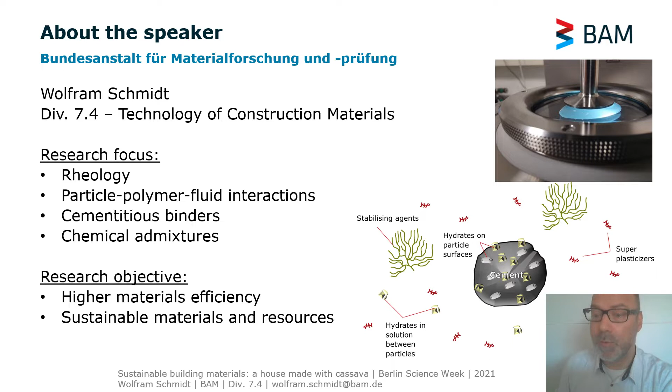Since rheology is in the center of my research, I'm also the secretary of the German Rheological Society, but at the same time I'm always trying to convert this research into more societal relevant aspects. Therefore, I'm also an officer in the Bureau and the Development Advisory Committee of RILEM.

RILEM is an international network of experts and laboratories in materials. And here I'm also the convener for Sub-Saharan Africa.

Together with RILEM, I've been heavily involved in the development of the global consensus on sustainability in the built environment, which can really become a game changer because all the relevant associations dealing with pre-normative developments and research, who have a big impact in the world, are involved. They take over the responsibility, but also the initiative to change something in the future.

This sustainability research has also been a companion to me over the course of the last 12 years, when I started to collaborate with researchers from all over the African continent in laboratory collaboration, but also educational activities and a lot of research activities.

Within this framework, in the year 2018, together with my colleague Dr. Kolawole Olonade from Obafemi Awolowo University, we were awarded the German African Innovation Incentive Award by Federal Minister Anja Karliczek. But this is not the only part of the research.

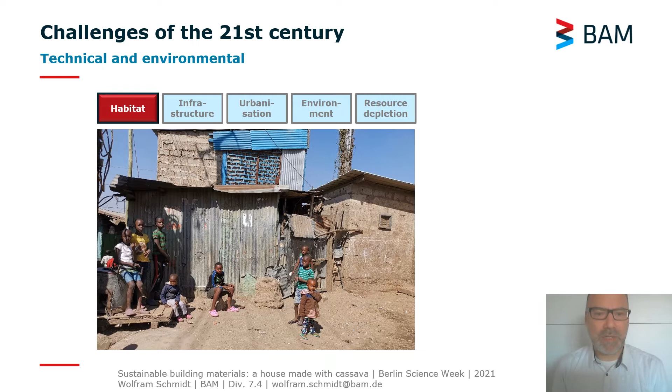Now, without further ado, I would like to come to the challenges of the 21st century, to the core of that talk, where we can see that at least from a technical and from an environmental point of view, these are the most challenging ones: habitat, infrastructure, urbanization, environment, and resource depletion. And if we take a closer look at these five challenges, we see that concrete plays a major role in creating these challenges.

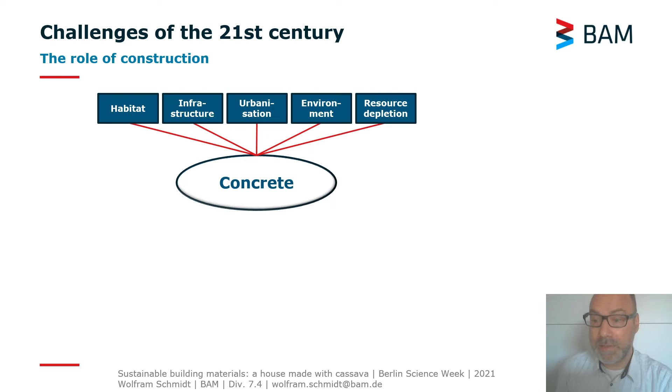Because concrete is nearly half of everything that human beings produce. After water, it is the second most consumed good on Earth. Concrete is everywhere. And we know that the entire built environment contributes to about 40% of the total global carbon emissions, the construction industry for more than 10%, and cement production alone for about 5 to 8%.

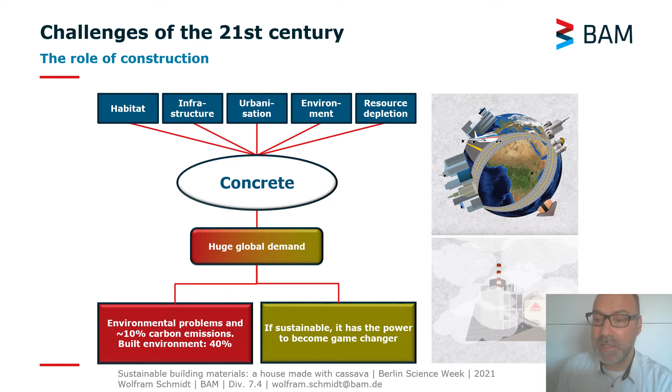So these are dramatic numbers where you could really get desperate. But on the other side, you can also see that if there is such a huge global demand and this material is required also in the future, if we change something in a material which is required all over the world, we also have the power to change something, because that is a huge leverage to really have an impact.

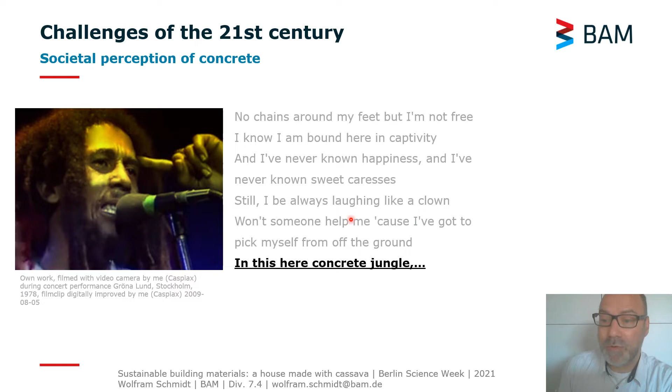But the problem is, concrete has a very, very negative perception in our society. Bob Marley already sung about the concrete jungle, where he sang, 'No chains around my feet, but I'm not free. I know I'm bound here in captivity in this concrete jungle.' So it really doesn't have a very good reputation.

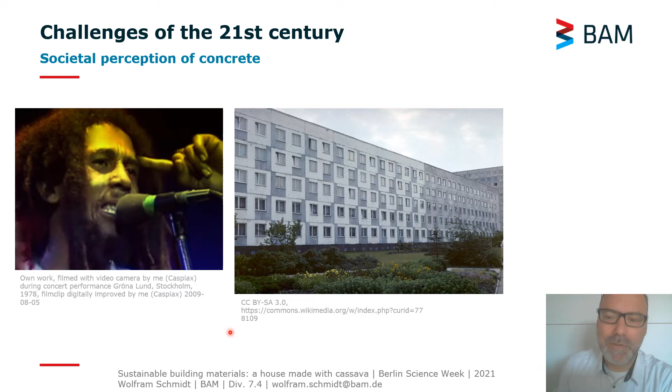And indeed, if we take a look at certain structures and certain quarters in our cities, we see this really resembles a concrete jungle. But is it really the fault of the material, or is it the fault of the architect? Because there is also wonderful architecture which has been implemented particularly by the strength of the material which is called concrete.

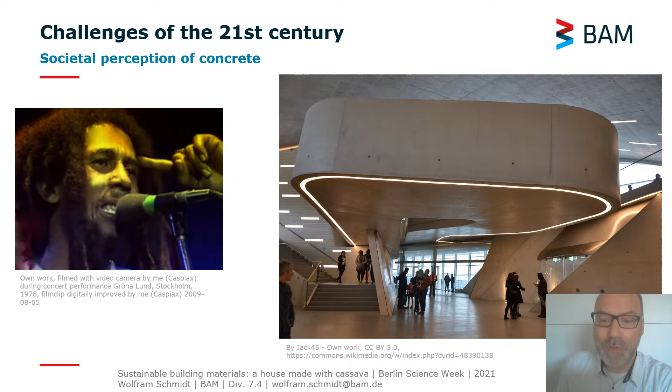Therefore, we always have to take a look at those materials that can really be used for our urban structures, those mass materials, which all have their pros and cons: earth materials, timber, steel, concrete. So we have to ask ourselves, why do we have to use concrete at all?

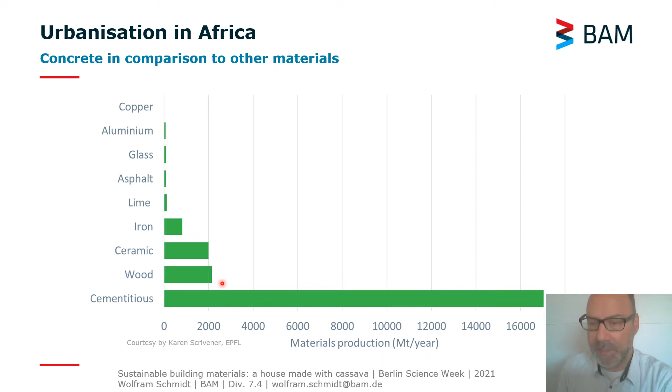And the simple answer is that cementitious materials are the only materials that can really meet the demand. Here in this figure, you can see the production of cementitious materials all over the world in comparison to other construction materials, and you can see that it's just an order of magnitude higher than everything else. And the production certainly also represents the demand on Earth.

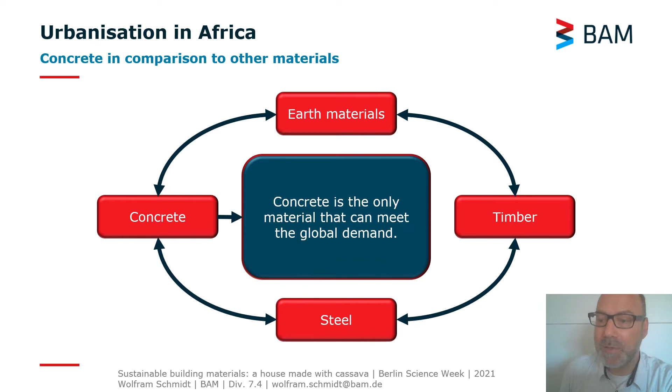And that means concrete is really the only material that we have on our Earth to meet the demand of the growing population to live in urban environments. It also means it's the material that will continue to build our cities.

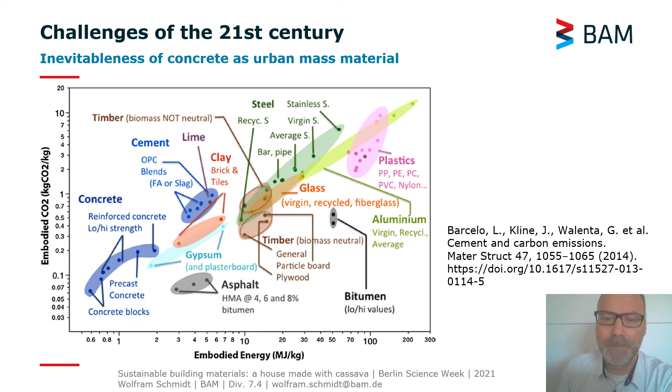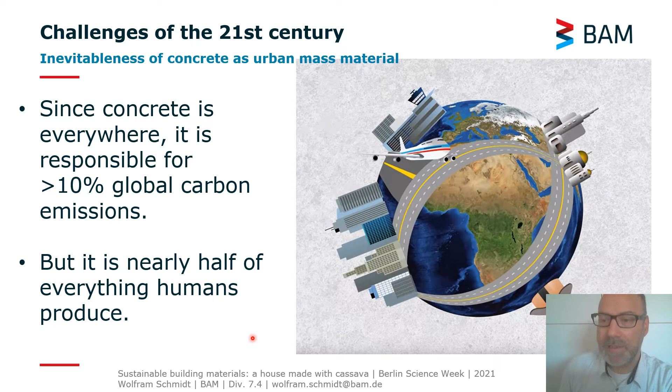We also have to see that, yes, it's true, concrete is responsible for about 10% of global carbon emissions, cement alone for about 8%, but we also have to see that concrete is nearly half of everything that human beings produce. In this light, these 10% are not the worst.

Another aspect that makes concrete absolutely inevitable is that the chemistry, the elements that are used to produce concrete, are exactly those elements that make out 98% of the outer Earth's crust. That means the chemistry of our planet also determines which materials to use, and in this case that seems to be concrete. We just have to look at different sources to find these elements.

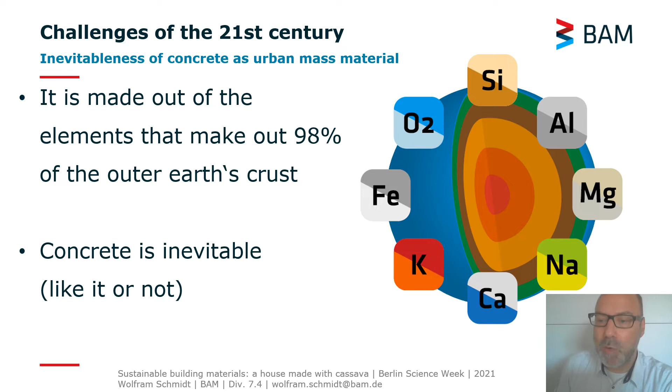So concrete is inevitable. Whether you love it or whether you hate it, it doesn't matter. There is no better alternative to concrete.

But the good news is there is a slightly better alternative, because we can make this concrete greener, more sustainable by using more sustainable cement types, by using better concrete types, and also by using less cement and concrete. Another aspect, which I'm not going to elaborate on today, is that we also have to develop structures that require less materials, or that use materials at their best performance ability.

So there is a special African challenge. I mentioned that already before a couple of times, and that is urbanization. We have to see that the urban population grows all over the world, or has been growing all over the world, and it seems the trend continues.

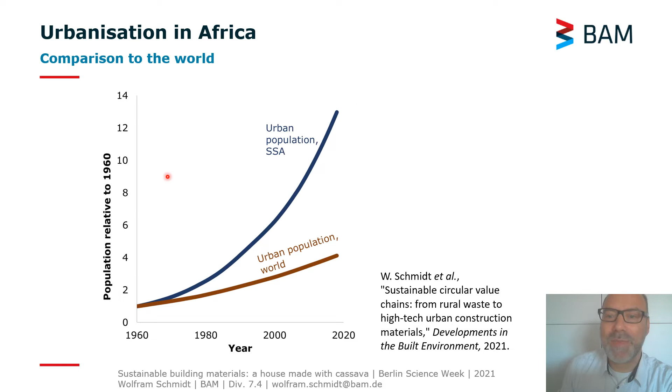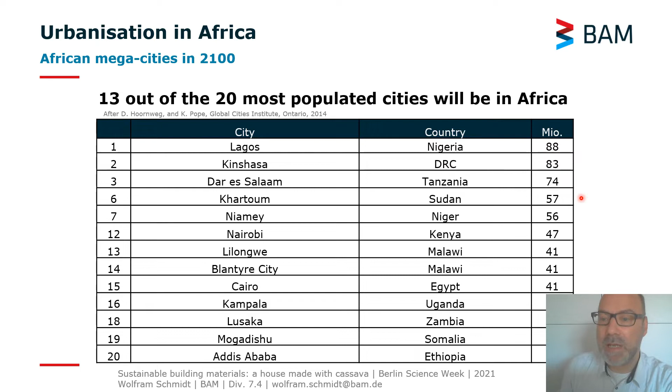But particularly in Africa, this growth has been dramatically higher. As a result, in the future we will have megacities in Africa which the world hasn't seen before. 13 out of the 20 most populated cities in the world in the year 2100 will be on the African continent. We will have cities like Lagos with 88 million inhabitants, Kinshasa 83 million inhabitants, Dar es Salaam 74 million inhabitants. These are challenges that are unprecedented.

And the good thing about it is that of those structures—these numbers are until the year 2050—of all those urban structures that will have been built until the year 2050, only 20% already exist today, which means we are going to build 80% of the urban structures in 2050 over the course of the next 30 years.

And 30 years, considering a construction process, is really not long. So we don't have time to spend on, okay, first we have to do this, and then this has to come, and then this has to come. If-then solutions are not an option; we have to act now, and we have to act all.

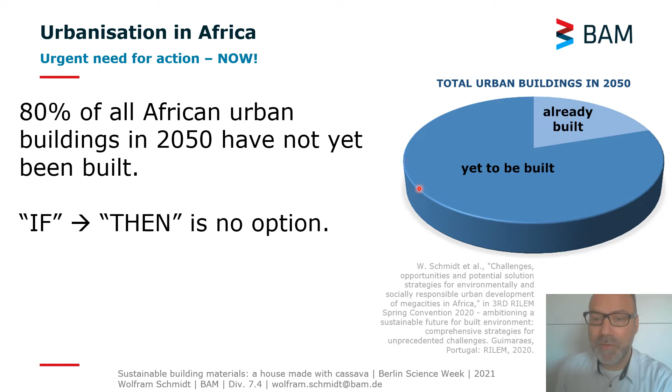That means we have to develop greener mass materials already now. Certainly there are technologies like carbon capture and storage that can contribute to a greener environment, but we cannot wait for that. We have to use the solutions that already exist today.

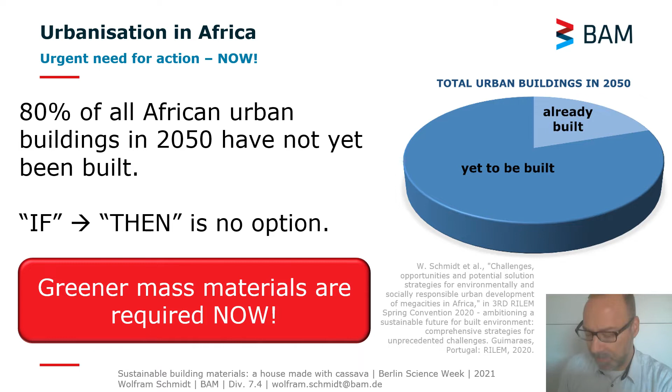And now let's talk about the innovation potentials in Africa. Therefore, maybe it is important to first see how concrete traditionally works.

We use cement, which finally, as a reaction with water, forms the cement paste, which is the binder for the sand and the aggregate, which are mixed with it.

Now, in order to make concrete greener, to reduce the carbon footprint, we have to minimize the amount of Portland cement clinker that we are using in our binder and replace it by so-called supplementary cementitious materials, which have a lower carbon footprint. In addition, the more water we add to concrete, the lower the strength and the worse the durability will be.

So we have to find ways to minimize the water content in concrete, and that requires chemical admixtures. Also, these chemical admixtures can contribute to compensate for some negative aspects, particularly with regard to workability of those supplementary cementitious materials.

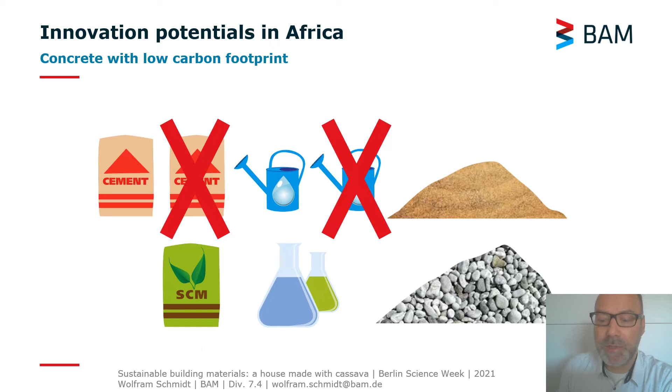So we have the supplementary cementitious materials as one part of the solution, and to understand how they work, it's necessary to understand that cement and water react, and immediately upon contact, all kinds of reactions take place at the same time.

And these reactions are very complex: new phases are formed and dissolved, adsorption takes place, crystallization processes, dissolution, precipitation, and so on. The type of reactions that take place, depending upon the chemistry of the cement, are very complex, and they can have all kinds of effects depending on the application as well.

But the most important phase is the reaction of the calcium silicate hydrate phases, because these calcium silicate hydrate phases provide strength to concrete. And pretty much linked to it, there is the formation of calcium hydroxide, which provides certain properties in concrete, but mainly does not contribute to the strength of concrete eventually.

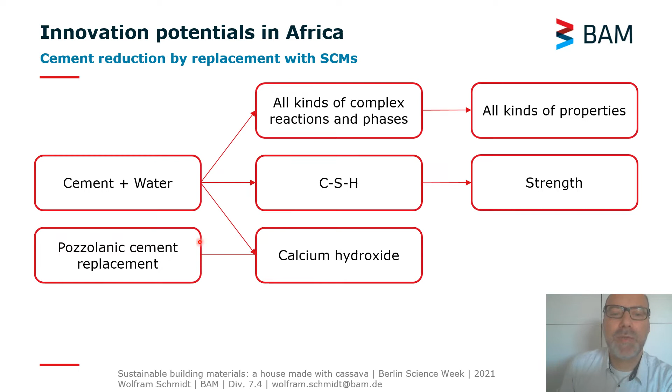And this is the point where the supplementary cementitious materials, particularly the pozzolanic materials, come into the game, because these pozzolanic materials react as a secondary reaction with the calcium hydroxide.

And this reaction forms supplementary calcium silicate hydrates, which give additional strength to concrete. And this additional strength potential can help us to reduce the overall cement, or the Portland cement clinker that we're using in our binder.

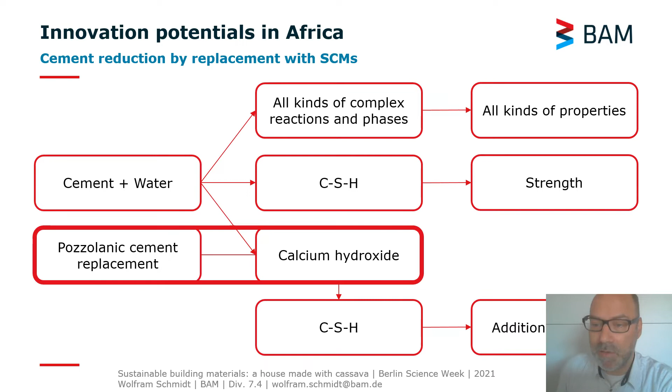Now the other part I was talking about is when we use chemical admixtures. In traditional concrete where no superplasticizer is used, cement and water are added for the reaction to form calcium silicate hydrates. But unfortunately, the water amount required for the reaction is too low to provide good workability of the concrete. So even though we could theoretically achieve high strength, when we cannot compact it, we cannot really use it. So we have to add excess water that provides workability, but this excess water, which does not react, evaporates and forms pores, and that reduces the strength of concrete.

Now, if we use superplasticizers, they adsorb on the surfaces of particles and increase workability without adding water, so we do not need excess water. With these superplasticizers, we can really increase the strength, and by increasing the strength, we can reduce the overall cement amount that would be required.

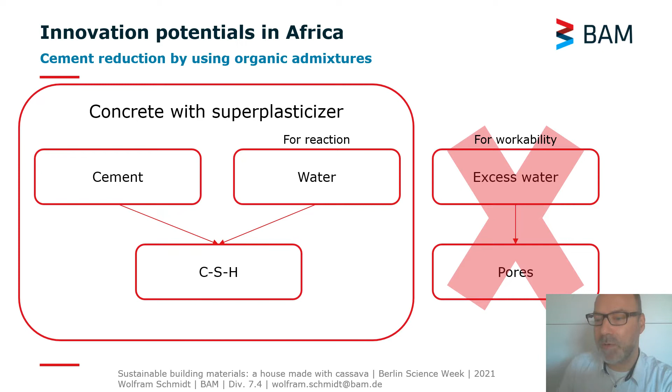So both strategies work in parallel. We've got these two strategies: we can save cement by reducing the clinker content, but in order to make the entire concrete greener, we have to find novel replacement materials like calcined clays, for example, or what I'm going to present about, waste materials.

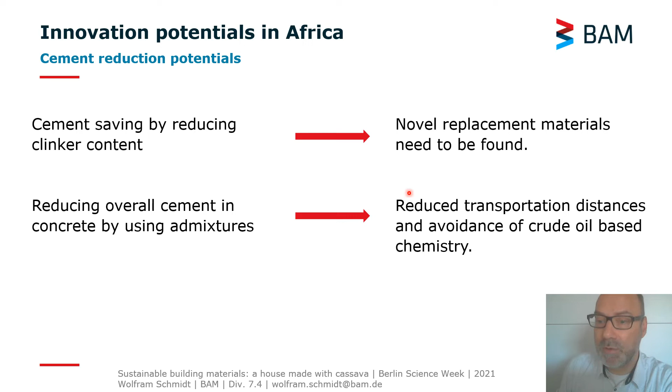The other strategy is to reduce the overall cement in concrete by using chemical admixtures. But these chemical admixtures today are typically based on crude oil. They are heavily processed, with a lot of transportation throughout the world to become precursors first, then chemical products, and then reach the applier. So there are also alternatives we have to look at, which avoid the use of crude oil-based chemistry. And these alternatives, particularly on the African continent, exist.

Cement replacements can be bio-based, like the ashes from maize cobs or rice husks, sugarcane bagasse, cassava peels, groundnut peels, and so on. And for the chemical admixtures, we also have plenty of nature-based alternatives, so-called polysaccharides, which are sugar-based polymers, like acacia gum, certain gums found inside the bark of various species, cassava starch, cocoa wastes, and so on.

But you have to see that in most countries, the total cement production capacity and the real cement production diverge differently. So the real cement production is often just half or a third of the overall capacity. So we could already multiply these values by, let's say, 2. Then we also have to consider that the yield per hectare in many African countries is very, very low, and it could be increased by a factor of 4 to 8. So then we can already multiply this previously multiplied value by, let's say, a factor of 4.

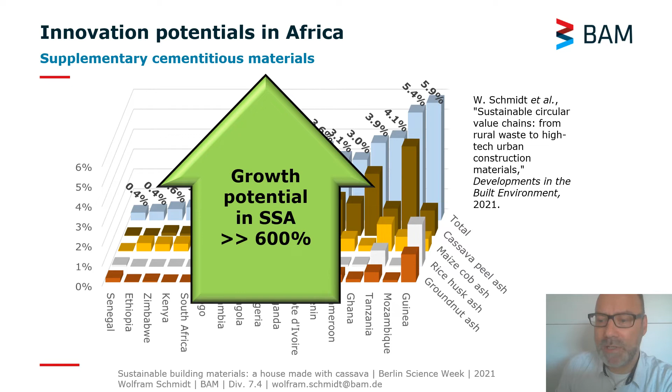And if we multiply this by the factors that are possible, in the future we already reach values which are higher than those cement replacements we are using today, like fly ashes or ground granulated blast furnace slag, at least in some countries. So there is a tremendous growth potential for bio-based wastes to become a resource for cement production.

And now if you talk about bio-based chemicals, the answer is relatively simple. We have plants growing all over the world. They all provide all kinds of polysaccharides, of sugar-based chemistry. We do not even have to think about it much - there's potato, cassava, maize, wheat, whatever. We always find plants with polysaccharides that have very positive contributions to cementitious materials.

And finding alternative cementitious binders and ways to optimize the performance of the cementitious binder is of utmost importance in sub-Saharan Africa.

Not only to contribute to a greener environment, but also to contribute to better livelihoods and lower prices, because reducing the prices for cement is extremely important.

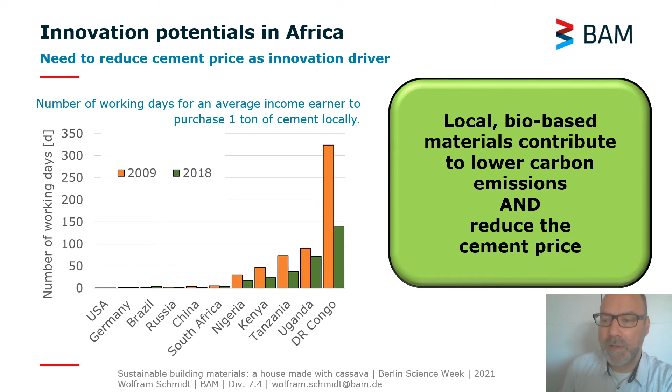So everything that helps to reduce the cost of cement also contributes to better livelihoods, to a better economy, and also to more equitableness in the region. This is a very good example of how a contribution to better climate also contributes to better markets.

And in order to underpin this, I would quickly like to show you this case study where we developed circular high-performance concrete value chains made of the wastes of cassava. Cassava, also known in other parts of the world as mandioca, yucca, or tapioca, is a very important plant on the African continent.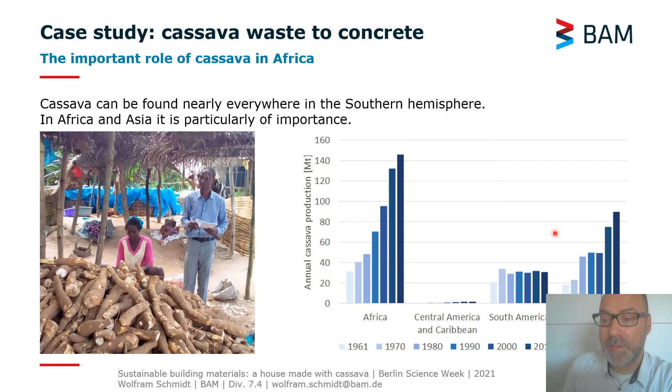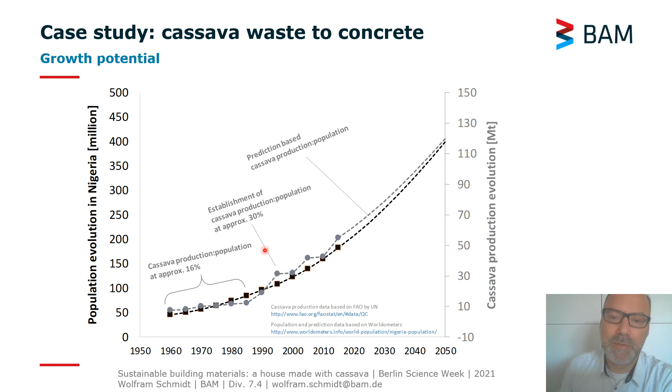Cassava is a very gentle plant which grows even on unfriendly soil, and it's very tasty and well nourishing. You can produce a lot of good food made of cassava, like fufu or gari and other types of food, which I really have started to love.

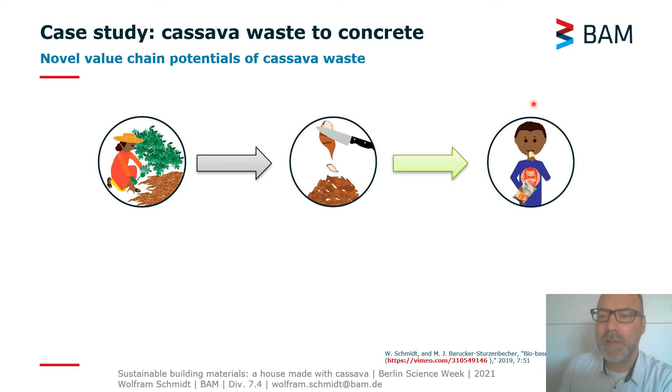What is happening today is that the cassava is harvested, and then the thick peels are cut off. Mostly there's a lot of starch still adhered to the peels, and then the inner part of the tuber is converted into a food product. Since the peels are not easily digestible for animals, sometimes even poisonous, they cannot be used for animal feeding. Goats would eat it if you blend it with some other constituents, but mostly these wastes have no use today.

People typically just dump it away where it rots, where it starts to stink, where it pollutes the groundwater, and where it requires a lot of space, which could be used in a better way than just dumping rotting bio-based materials upon it.

Instead of considering that as a useless waste, it's possible to first derive the easily soluble organic components, mainly starch, from these waste peels and convert it into a superplasticizer to reduce the water content in concrete, and this way tickle out more performance of the cement, and save overall cement in concrete. Then the residual peels, after obtaining the starches, can still be burned.

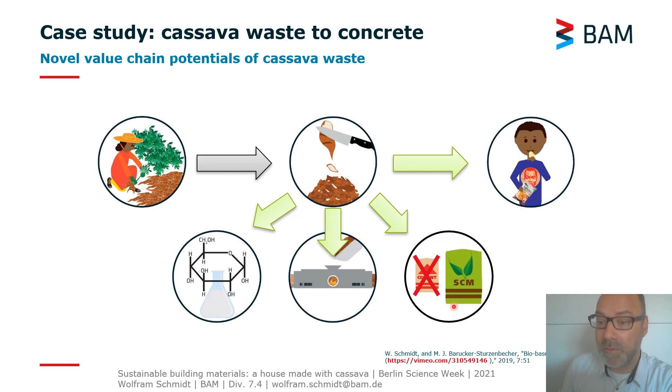There's still a high organic component if you do it the right way. In the first step, you can go for pyrolysis, or you can do it without carbon emissions and obtain additional precursor components. After that, you can still burn it and derive ashes which have cementitious properties. These ashes can be used to replace Portland cement clinker, which is much higher in carbon footprint, and this way additionally contribute to better climate.

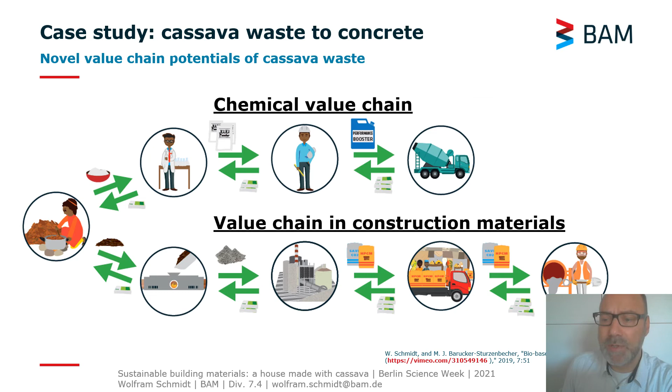The positive thing about it is that it's not only contributing to the climate, but it also creates new value chains, and these are local value chains. So from something which formerly has been just a food product, now with the wastes of this food product, it's possible to create a chemical value chain for chemical admixtures that help reduce the carbon footprint, and another value chain where energy is produced and cementitious binders are produced for mortar, for dry mix mortar, for example, or as a cement replacement, or for concrete production. These are all local value chains, which also help the regions in which cassava grows to economically grow.

Since people typically do not really believe in that, although chemically we understand very well what's happening here, I would even dare to say that it's not even new, because we have been using fly ashes, microsilica, and ground granulated blast furnace slags in the past.

Here we're using the same chemistry, just a different resource, one people often distrust because they believe bio-based resources only qualify for low-tech or low-end construction. That's not true—it's just a different source. To make this more tangible, we are currently building a small structure made of cassava-based concrete.

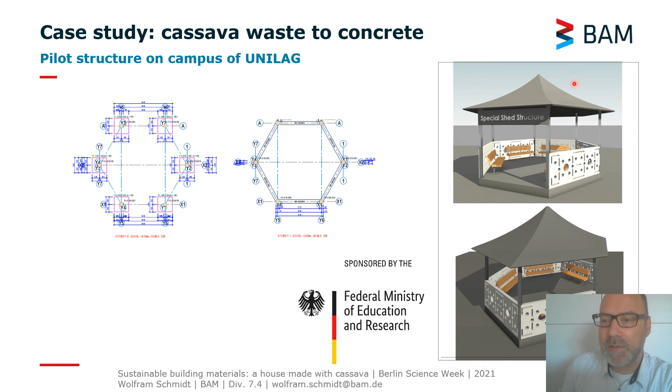This structure is currently being built. Due to COVID everything has been significantly delayed, but now it's happening on the campus of the University of Lagos, and I hope that next year this structure is finalized, supported by the Federal Ministry of Education and Research.

The contribution is not only better construction technology, but has a much more global scale, because today livelihoods in rural environments are decreasing. Rural environments deliver farm products to the cities, but prices are going down and competition is increasing internationally, so livelihoods for rural farmers are not very good.

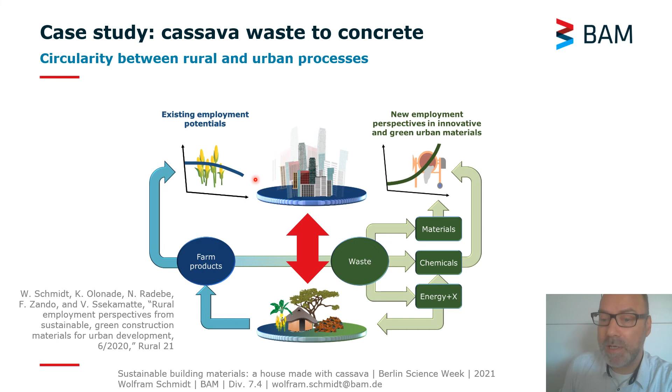Instead of just delivering food products to the cities, in the future it's possible to also use the wastes and convert them into materials, chemicals, energy, and additional chemical components. These can be used for urban construction materials, specifically concrete, which also creates new employment perspectives in the urban environment. This way, money flows back to the rural environment and contributes directly to the development of rural areas.

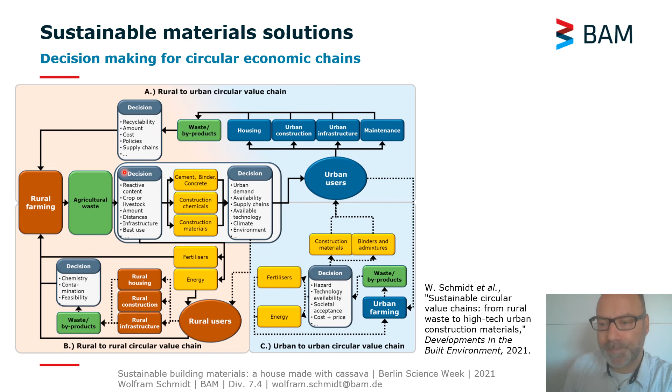But there's certainly a challenge. We have to work on concepts for how we can create rural-to-urban, rural-to-rural, and urban-to-urban circular value chains. Everything depends on the environment, the supply chains, transportation distances, and the quality and quantity of materials—meaning every decision about how to take the process to the next step involves many decision-making processes in between.

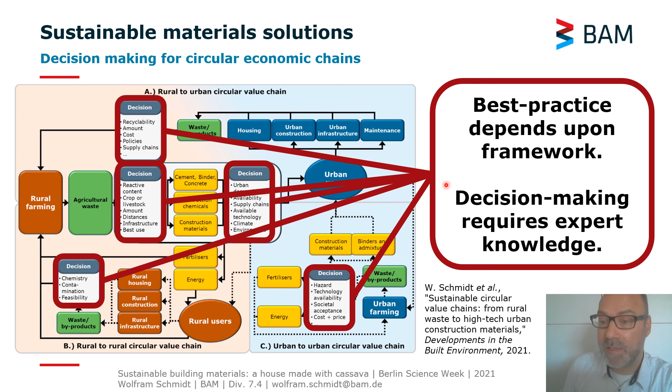The best practice varies from place to place. There's not one way—there's only a best practice specific to a specific environment. And that requires that people talk to each other and understand the different challenges.

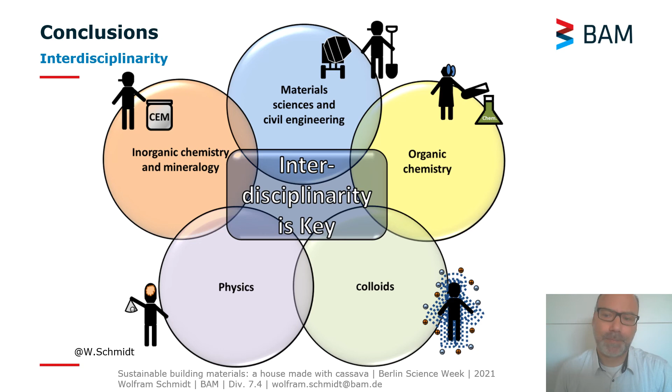This brings me to the conclusion. If we have so many best-practice solutions specific to different regions, where decision making is so complicated and requires the knowledge of so many people, we have to work together more in an interdisciplinary way—where experts from different disciplines, from chemistry to colloidal physics, inorganic chemistry, materials science, mineralogy, and civil engineering, work together and bring these concepts into the right context to derive solutions specific to the individual situation, which are always the best in the end.

But not only interdisciplinarity is important, but also inclusiveness. Today in the engineering area there's still a lack of female participation. What we require is that we find the best talented people to work on the best solutions, but we cannot continue to just recruit the best talented people from the male pool. There's another pool—50% of the female population—that has the same number of talents. We have to bring these talents together and work hand in hand.

This is one of the reasons why I'm currently involved in the Female Academic Leadership Network for Conscious Engineering and Science Towards Sustainable Urbanization, www.falcones.org. This is of highest importance.

What is also important is that we find new ways to teach our future decision makers. That requires that we raise engineers in the future who also understand the beauty of nature, of history, of markets, of the micro scale as well as the global scale. That also means teachers, professors, and students have to work much more together to derive the best possible solutions.

Professors have the knowledge and the wisdom to give to students, but students have the nowness and the affinity to novel technologies and innovation. Students and professors have to mutually lift each other up to higher levels to become more conscious and derive the best possible solutions. Today's decision makers should not work only among themselves, but should already start to mentor the next generations—students, school children, and even the smallest children.